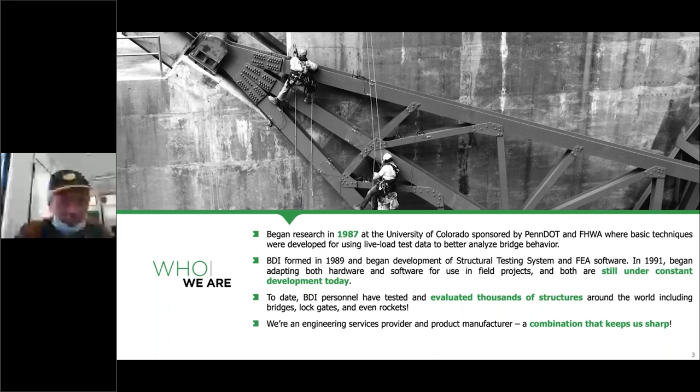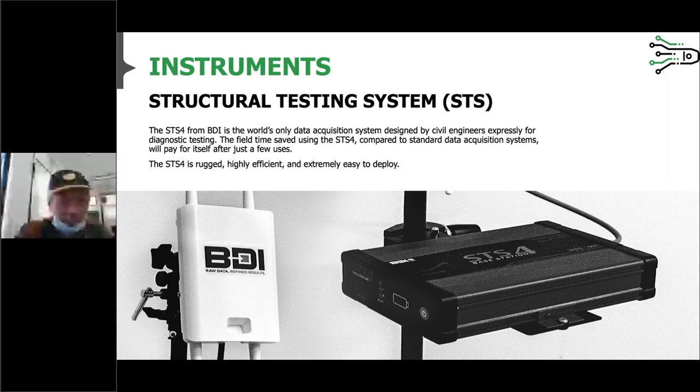The system really contains a few components when it comes to how it works. Typically, you'll see a group of sensors and data acquisition - in this case, we have 4-channel nodes and a group of sensors, and there will be many of these placed around the structure. We'll have a base station that will create the wireless network on site, and we'll have a load position indicator that we use for tracking the position of the truck on the bridge as we're conducting our test. And then we have an application where we would be controlling this hardware in real time while we conduct the test.

What makes our system unique really centers around our IntelliDucer. This makes the system very easy to install. Every single sensor that we plug into the system self-identifies - within this connector here, we have a memory chip, and it will contain all the information about the sensor, so that when we're in the field, we can plug it into any one of these nodes, any channel, and it will automatically identify itself.

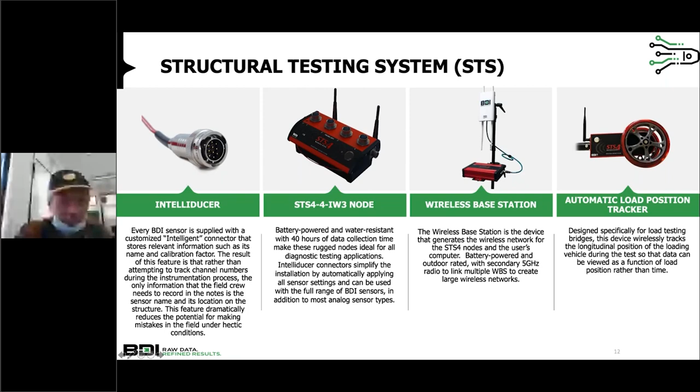The next set of instrumentation we have is our structural monitoring system. This is a little bit more complicated in that we have a system that is intended to be deployed permanently or semi-permanently on a structure to collect data over some period of time, or maybe even the life of the structure.

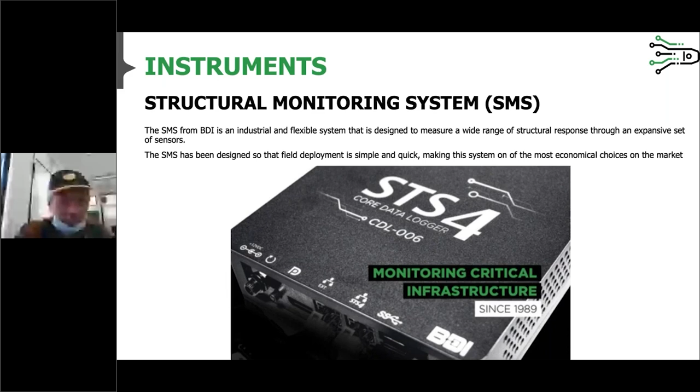So this system contains a few main components, and I understand there's a lot of words on here - we'll be sharing this presentation with everybody, so we'll give you a chance to download this after the webinar. But essentially, what we typically have is a central data logging system that will have our data logger, some sort of external communication method, which could be a cellular modem, satellite modem, or maybe a direct landline. We would have a battery backup system and then some source of power.

Within there, we would have internal communication and power distribution. Then we would distribute the data acquisition system out to closer to where the sensors or group of sensors are located. So really what we call this is a distributed data acquisition system for larger scale monitoring applications.

The other side is how we collect the data itself. We have applications to configure the system locally or remotely. We can push the data to a client server, or we can push it to our cloud and provide a hosted service, giving our clients the ability to log in wherever they are and manage the data that's being collected.

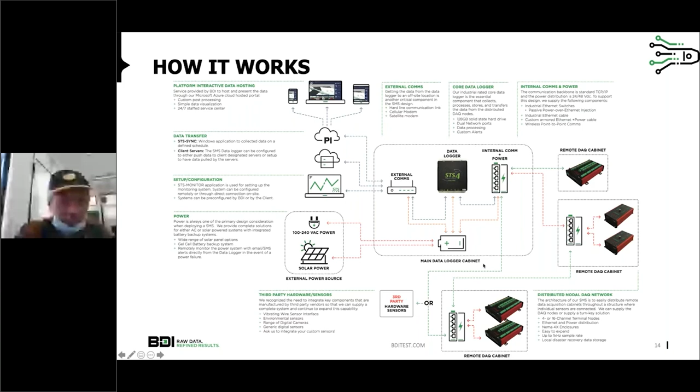The systems really break down into a few main components for us. We have data acquisition devices that are distributed throughout the structure. We have our core data logger, which is the brains behind the structural monitoring system. It collects all of the data and processes it into data files, then ships that data out off-site. And then the other component is really the power and communication of the system itself. It's important to have a very robust power system as well as a robust and redundant communication system in a monitoring project.

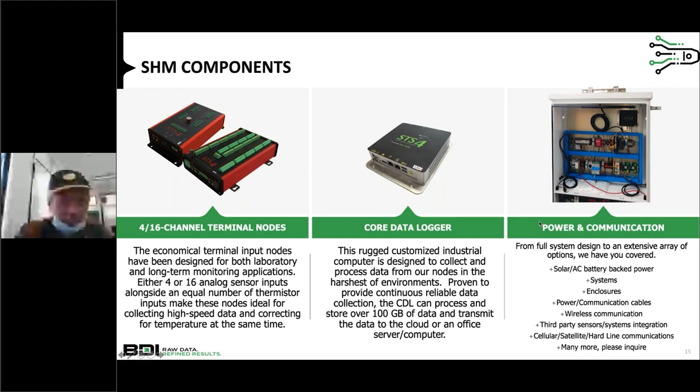With regards to sensors, we produce really just a handful of sensors, which accounts for probably 80 to 90% of the sensors that we typically use on a structure. That's strain, acceleration or vibration, rotation, and then also foil strain gauges when we need to measure strain at the surface of the steel or concrete, and then displacement sensors. These are really the main sensors that we deploy out on a project.

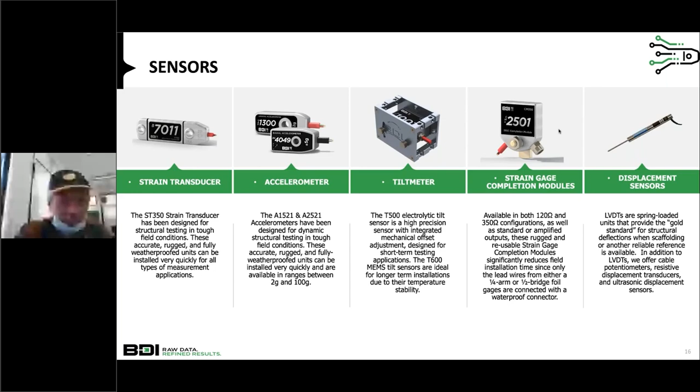We can also deploy other devices as well, depending on what the project is looking for. A very typical system and sensor we would deploy is an acoustic emission sensor, and we use those for identifying cracks that might be occurring in steel or concrete. They're particularly used on cables and pre-stressing concrete where there's post-tension tendons, and we're concerned about the potential for wire breaks within those tendons as these large cables age and maybe don't have the latest dehumidification systems or aren't sealed correctly. They tend to corrode, and as you get wire breaks, it's important to identify those, and acoustic emission can identify those.

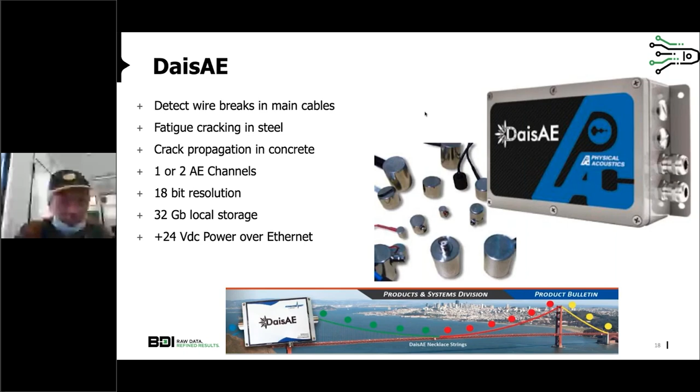Other sensors that we've integrated that are common on many of the larger scale monitoring systems include vibrating wire sensors, a very typical sensor that produces many different types of measurements. Weather stations are very typical to include on large scale structures. We've included pressure gauges in some instances where we're looking at a pressure cell, maybe at a bearing location. Load cells may be used in line, in some cases in cables or tendons.

A common one that we've installed as well is weigh in motion, and this is important for being able to track the load that's being applied to the structure in real time. We can correlate the load to the response of the structure. Wind speed is another common measurement to take, especially on large scale cable stay or suspension bridges.

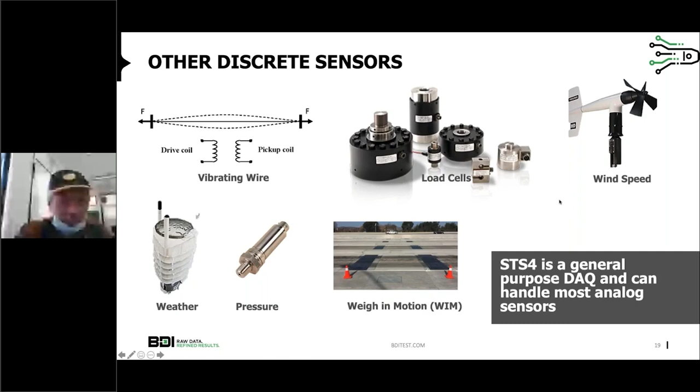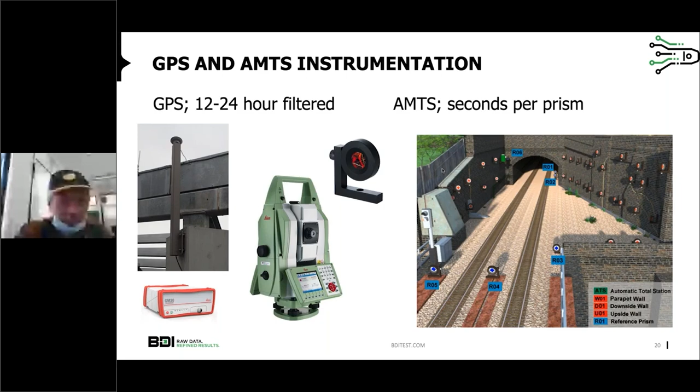Another system that we would integrate on different monitoring projects is GPS sensors and automated total stations. They can be used very effectively in some cases where we're looking at the three-dimensional position of, say, a tower on a large cable stay bridge or suspension bridge. An automated total station will help to look at a deflection profile of a large scale structure, so they're nice tools to add to typical structural monitoring.

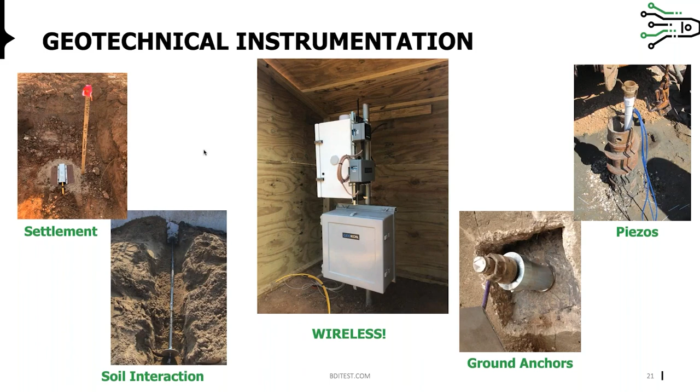Geotechnical instruments are also critical to include in some of the monitoring that we're doing at the outset of construction, looking at potential for settlement, interaction of soil with the abutments or piers, ground anchors in some cases we've installed, and of course groundwater elevation, which is always critical for looking at slope stability around a structure.

Vibration sensors are also another common one, and I think probably used a fair bit in Indonesia, since there's a very highly active earthquake area there. Being able to identify earthquakes and the peak ground acceleration as it correlates to the structural response is a very common measurement to include in a monitoring system.

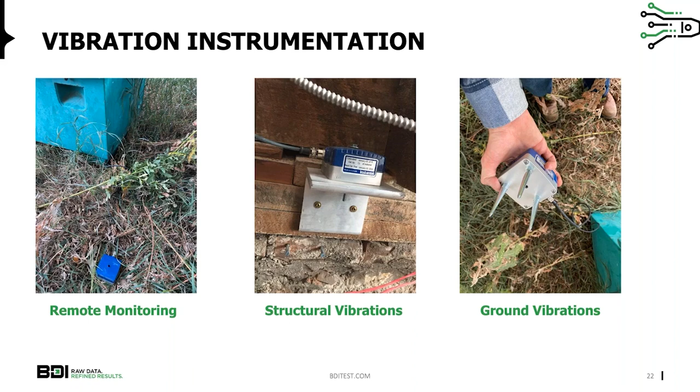I mentioned a little bit about weigh in motion. Why it's really so important is we've used this for looking at fatigue cycles in structures, to be able to look at the true live load impact that is being introduced on the structure itself. Overall, it's quite economical to install these weigh in motion systems now. There's a couple different varieties depending on the accuracy you're looking for, but they work very well for correlating load response to structural response, and even more important nowadays, as digital twin modeling is becoming much more prevalent in structural health monitoring.

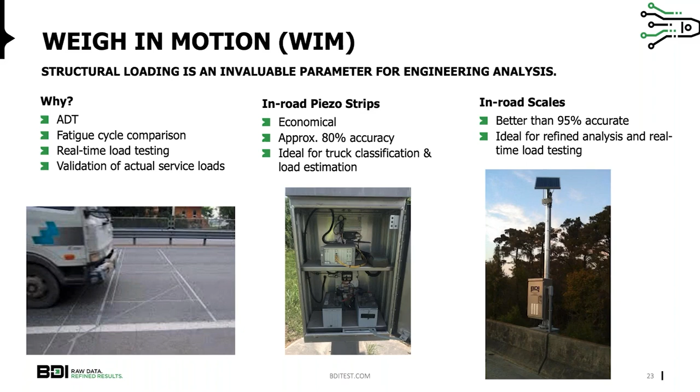Wireless, of course, is another tool to deploy depending on the difficulty of being able to install a hardwired system. Being able to integrate different wireless technology with maybe more traditional structural health monitoring is really important to be able to keep a system more economical, and now works quite well, even running on batteries for many years at a time now. So these are all the typical tools that we look to deploy on a monitoring system.

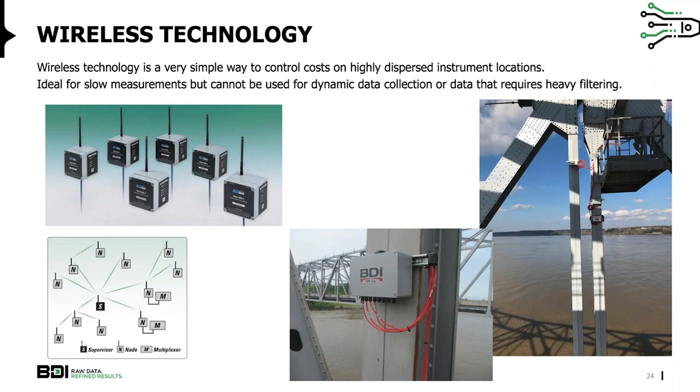When it comes to our software, again, we tried our hardest to develop a very effective tool and a powerful tool, yet keeping it very simple to use. So with everything being self-identifying, it's very easy to deploy a testing system or a monitoring system and immediately start collecting data.

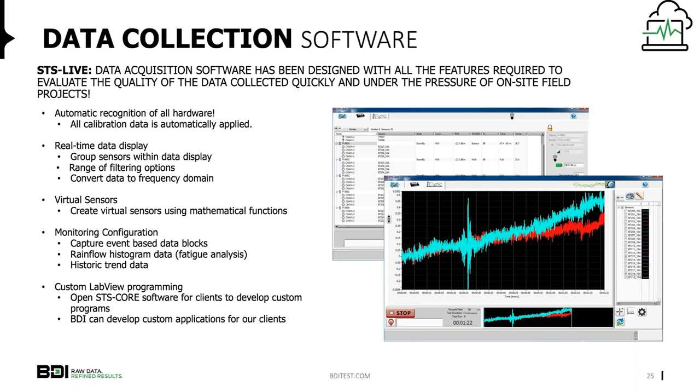It gives us the option to add filters to the data, essentially allowing some more refined data processing on the data that was collected. This is typically pretty important as we start refining that data and preparing the data for what we typically do, which is a finite element model analysis coupled with the data that we collect.

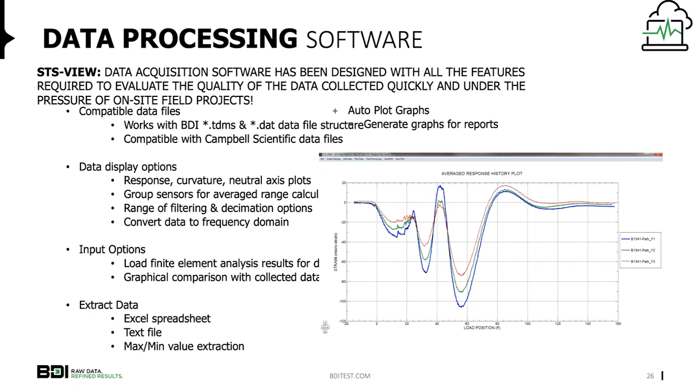This application will allow us to enter the cable properties. With those cable properties, it can find the peak frequency mode and calculate the fundamental mode so that we can calculate the in situ force of the cable. We have quite a few projects where we're hired to go out and evaluate cables that are installed on various structures. And this is the application we use to do that.

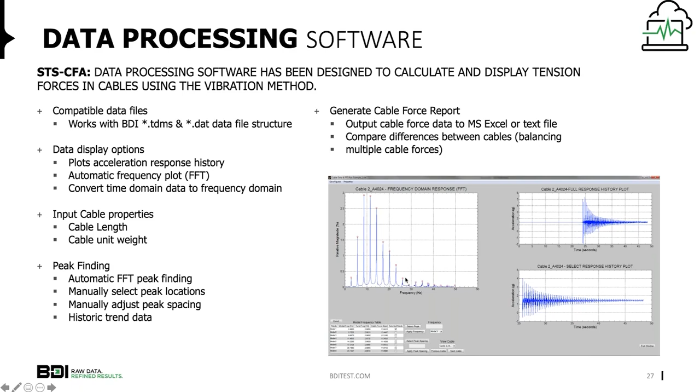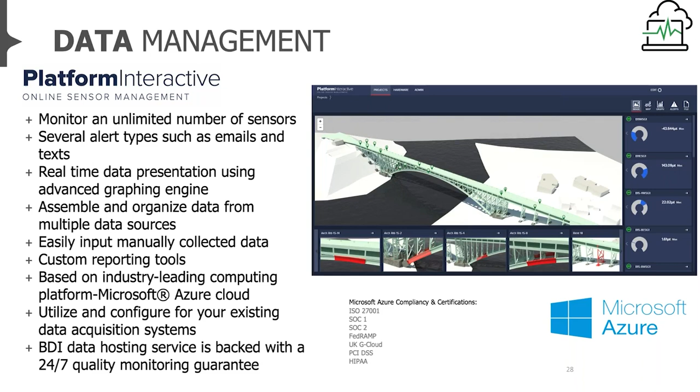The other side of our application or software is really the data management for large-scale monitoring systems. And I think it's extremely important to have a tool that can represent and display the data in a meaningful way. Most owners of structures are not interested in looking at the raw data or all of the data being collected on a structure, but they're interested in what maintenance decisions need to be made on that structure. So we tried to develop an application that will really help owners make real-time decisions on maintenance programs for their structure.

Another important aspect to particularly structural health monitoring is the quality control of the data. How do we manage the quality of the data coming in, and how do we know that all of our systems are performing optimally? So we have systems that we've developed to manage our communication, manage the hard drives of our data logger, manage the power systems that are out on a given site, and give us warnings when things aren't looking like they're up to where they should be. So this is, again, an important part of being able to manage a structural monitoring system.

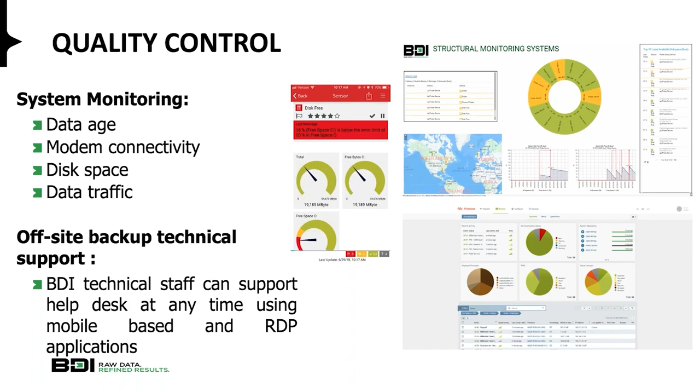So next, I'd like to talk a little bit about diagnostic load testing. This, again, as I mentioned earlier, is really how the company started, and still one of the main services that we offer as a company here in the US.

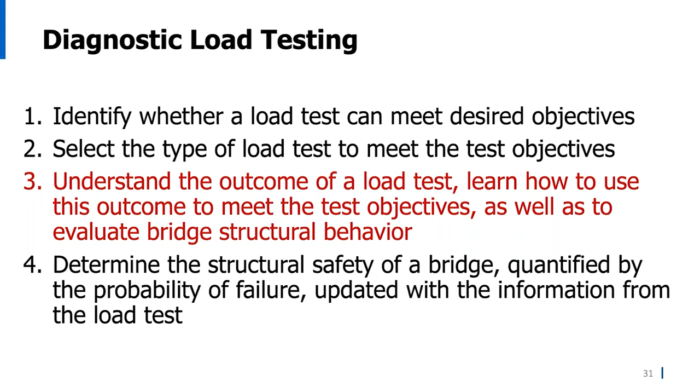Part of conducting a diagnostic load test, we really need to identify whether a load test can meet the objectives. First, we have to understand what problems are occurring with a structure and will a load test meet those objectives. Once we understand what the problem is, then we can select the type of load test to meet those objectives. Understanding the outcome of a load test, learning how to use this outcome to meet the objectives, as well as to evaluate the bridge structural behavior. Then we can determine the structural safety of a bridge, quantified by the probability of failure, and update with the information from a load test.

So really, what is a load test? A diagnostic load test measures the true actual response of a structure against a known load, and that's for the purpose of developing a realistic analytical model. The load tests are often used to reduce uncertainties with respect to as-built conditions that may not be able to be analyzed through traditional methods. This is typically secondary effects, something like a guardrail, a sidewalk, what is the true transverse distribution, or potentially other secondary non-structural elements that may change the response.

We typically use a maximum service load for the load test itself, and it is typically performed in a very short time frame with a low impact on traffic. The data that's collected is used to refine and validate an analytical approach, and that is typically a finite element analysis or finite element model of the structure. The final result is typically an updated load rating for the bridge with critical load rating locations.

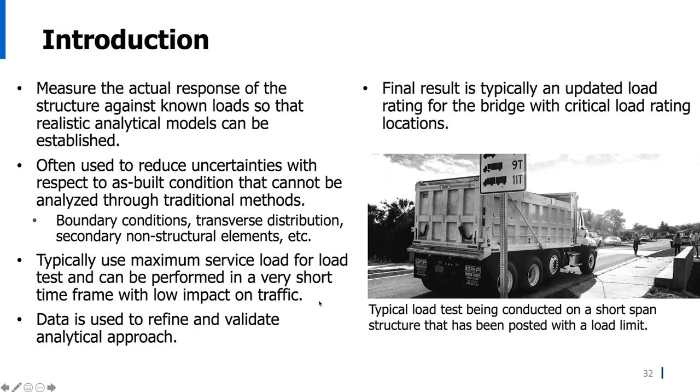Skip one here, sorry about that.

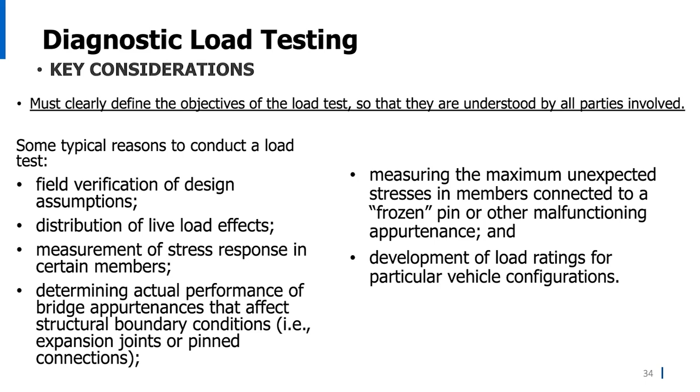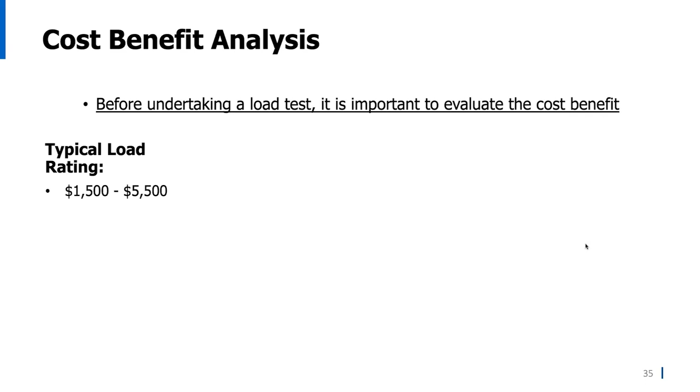One thing that's always important to look at is the cost benefit analysis before undertaking a load test. These numbers are typical average range in US dollars, but if we were to conduct a typical hand load rating calculation, the cost would range between $1,500 and $5,500. A typical diagnostic load test, this is what we would charge to go out and conduct a load test here, ranges between $25,000 and $35,000, but does not include access or traffic control. Typically, the access and traffic control is handled by the bridge owner.

And then what are the alternatives? What has to happen if we don't conduct a test? There's potentially replacement of the structure, potentially strengthening or repairing, or load posting the structure, which may have economic impacts with having to reroute critical traffic. So really, it comes down to going through the exercise to calculate what that alternative is, and that's going to allow you to better understand the cost benefit.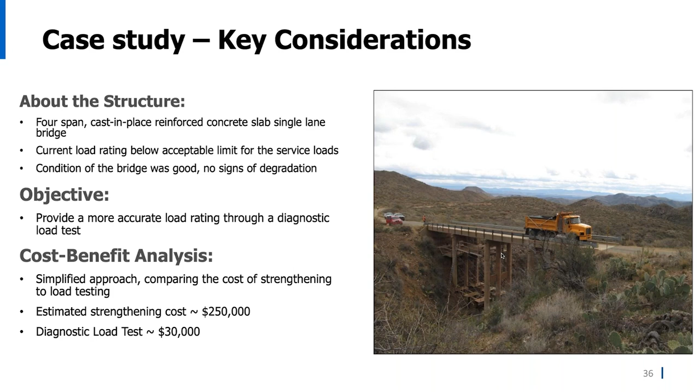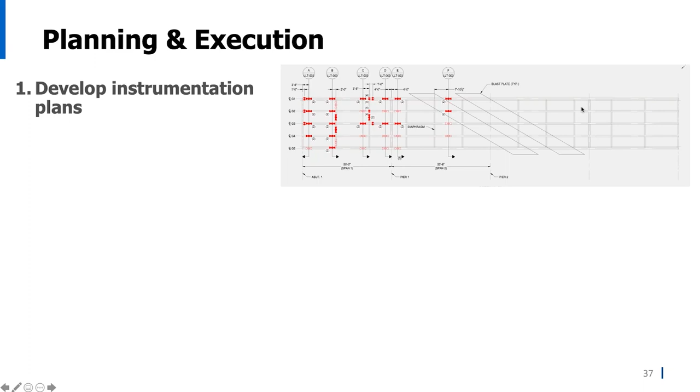So the first phase of any diagnostic load test is planning and execution. The first thing we do is develop instrumentation plans. And in a structure like this, where we have 4 spans, we focused our instrumentation on 2 of the 4 spans and used the symmetry of the bridge to assume the responses would be the same in those other spans. Site planning: we had to develop access to the bridge and traffic control, and we had to hire a loading vehicle, in this case a dump truck with gravel.

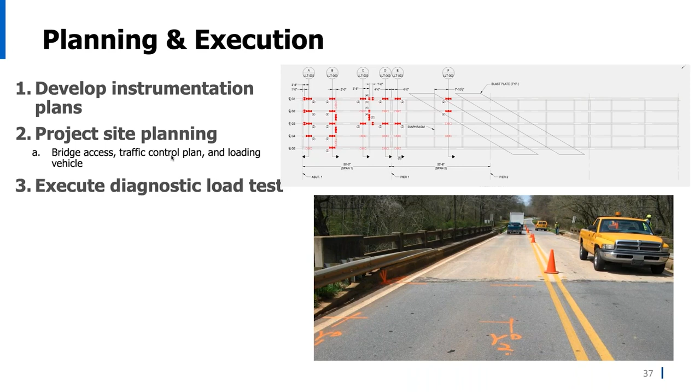The next is we execute the diagnostic load test. We collect the data on site, and one of the more important portions is to really validate that data while we're on site. There's a lot of cost in going out and collecting the data, so we need to be sure that we are collecting good quality data. And again, that goes back to the software we've developed, giving the engineer on site the tools to evaluate that data and ensure that they're collecting good quality data.

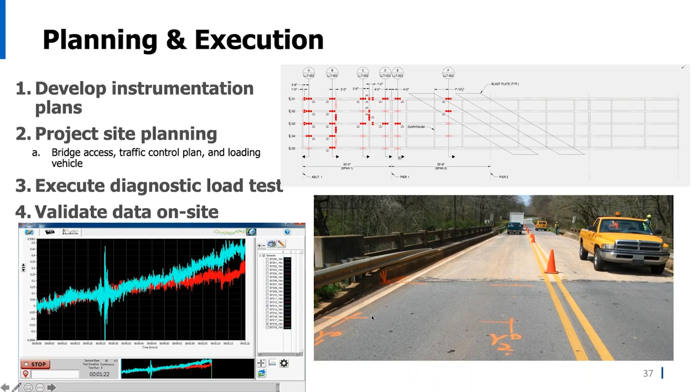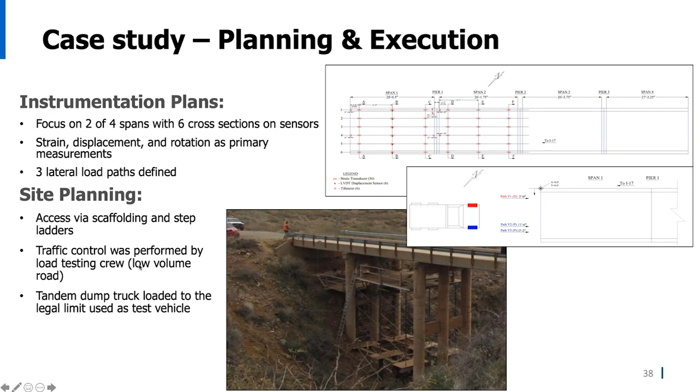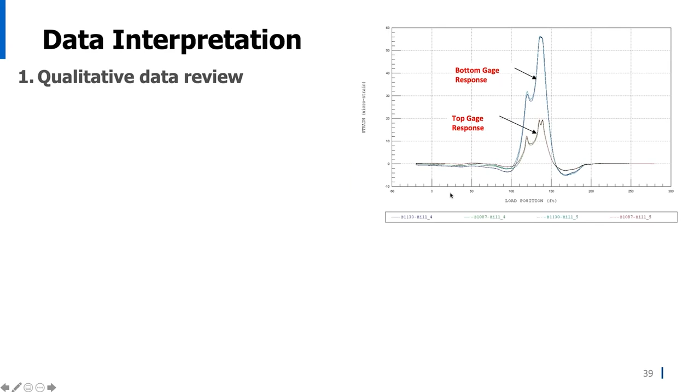Data interpretation: the first thing that we do is we look at the quality of the data. We look at reproducibility and looking at data that starts at 0 and ends at 0. So we spend a good amount of time evaluating that data up front before we start getting into the analytical model. The next is to develop our analytical model.

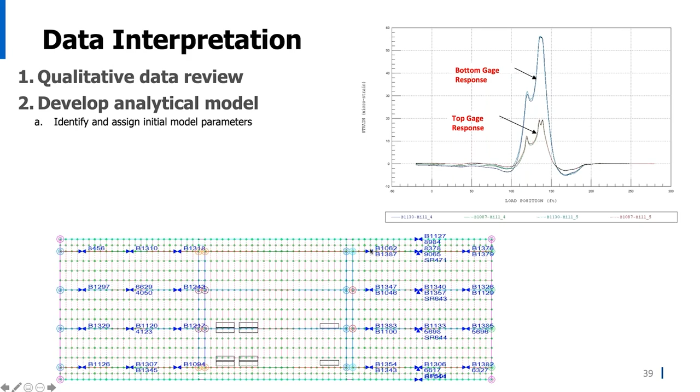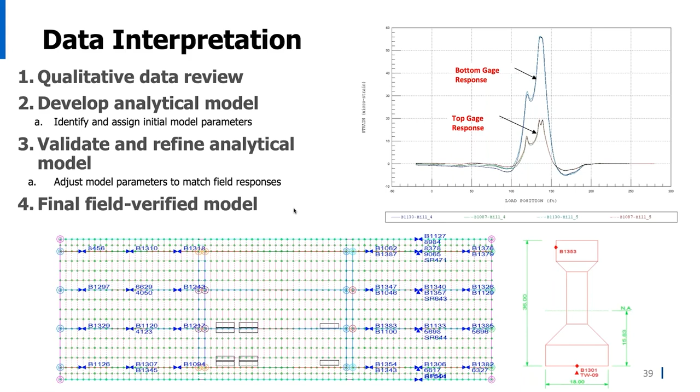And as you can see here, what we do is we reproduce the field load test in our finite element analysis software. You can see sensors even in our finite element analysis. You can see the footprint of the truck. So we're reproducing that load test in our computer model. We then start adjusting the parameters of our model until we have a final field verified model. The results from our finite element analysis match the results from our field test. So again, we're looking at the quality of our data, reproducibility.

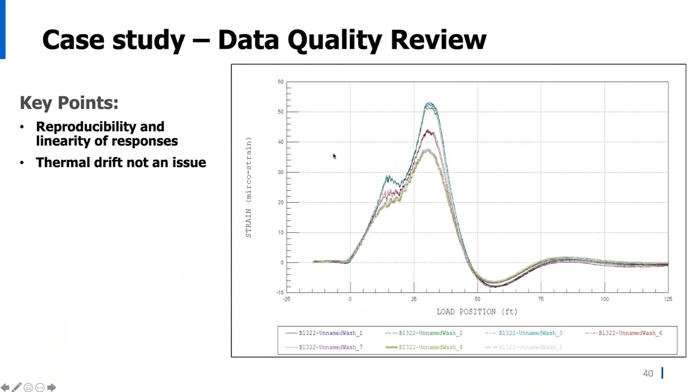Some of the modeling parameters, and again, I know there's a lot of words here and I don't expect everybody to read them all, but we have some basic parameters that we look at refining. Secondary members stiffness, bearing support conditions, modulus of concrete is a typical one for us to be adjusting. Member eccentricities, really the geometry of our model, and then connection stiffnesses.

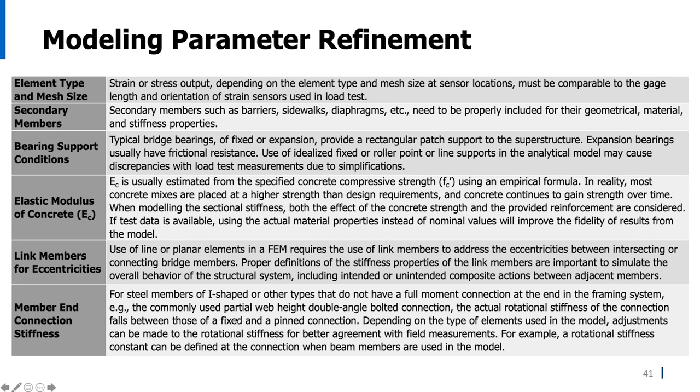In the case of the bridge we tested, these were the model parameters that we developed for this bridge. It was a 2D model of shell and frame elements. We had a 2D footprint of the truck. We did loading increments every 2 feet. So we had 204 load cases. With the 36 gauges and 6 displacement, 6 rotation, we had 9,792 measurements to compare against for all those load conditions. So you can see it's a very refined process for analyzing and adjusting our model.

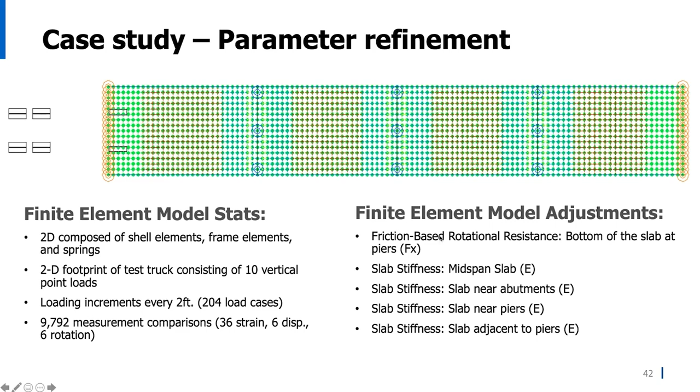What we adjusted were the stiffness of the supports, the slab stiffness in different regions of the bridge, because we had positive moment and negative moment regions that crack differently and create slightly different stiffness of concrete there. The end result, you can see the dots here overlying on our lines. You can see we had a very good correlation between the field data we collected and the analytical model output. We had minor adjustments to some of our parameters, and finally had a very high correlation coefficient between the measured response and the analytical data.

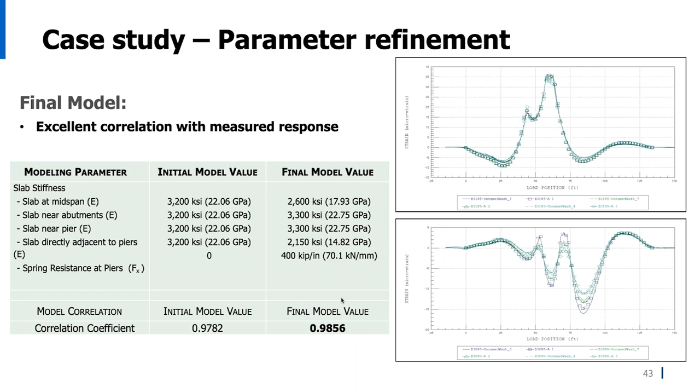And then finally, we apply our load rating formula within our model itself. We have potentially some adjustments to make in our model to reduce or to add some conservatism to the capacity. We still do have to calculate our capacities of the elements of the model based on geometry and member properties. We have to apply our dead load to the structure, and then we can extract those results.

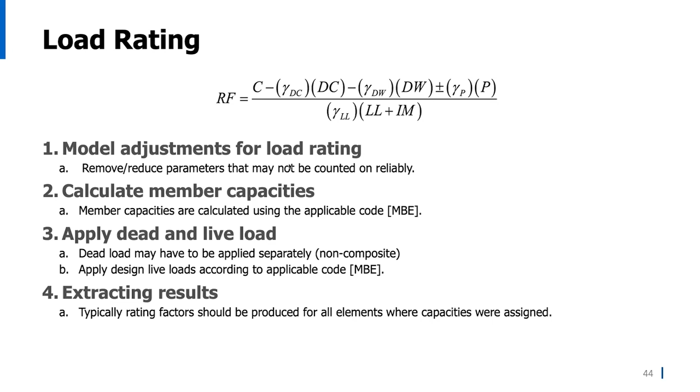And finally, we can report. And it really is a very focused report that outlines the results and any recommendations. Typically, this involves an executive summary with purely the load rating results, a summary of our load testing procedure and instruments, what our analysis approach was for the project, and then any load rating recommendations. With a finite element model, we can really provide detailed load ratings for every component of the bridge itself. So it becomes a very powerful report if we're going to target any retrofit or construction work to strengthen the bridge itself.

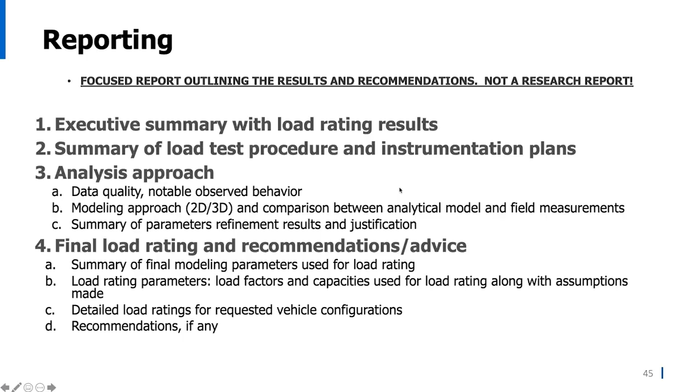So moving on from diagnostic testing, we'll talk a little bit about structural health monitoring. So structural health monitoring, we usually get asked why, and what are the reasons we need to execute a structural health monitoring program. Typically, it involves looking at structural performance over a larger period of time, where a diagnostic test is really a snapshot of how the structure is performing at that time. When we want to look at the performance over a longer period of time and take into account some of the other variables other than pure live load response, like settlement or temperature-induced stresses, potentially it has to do with the construction of the bridge itself, and maybe for verifying new design techniques.

Other reasons are for supporting inspections, looking at the performance of key components of a structure that are typically causing issues on the maintenance side. It allows the owners to keep a remote eye on the performance and particularly potential problems or specific problems within the bridge itself. We can look at road surface conditions, and we can look at weather and how that relates to the performance of the structure.

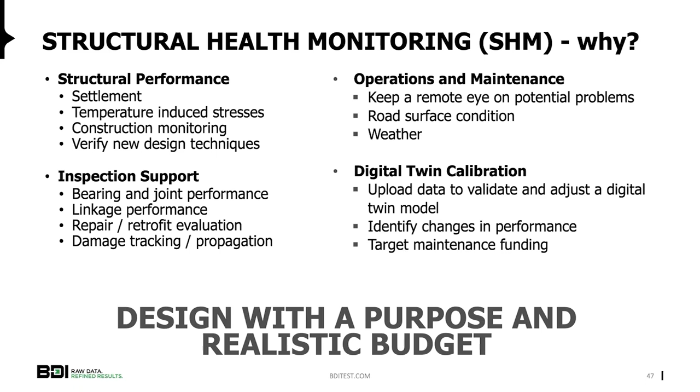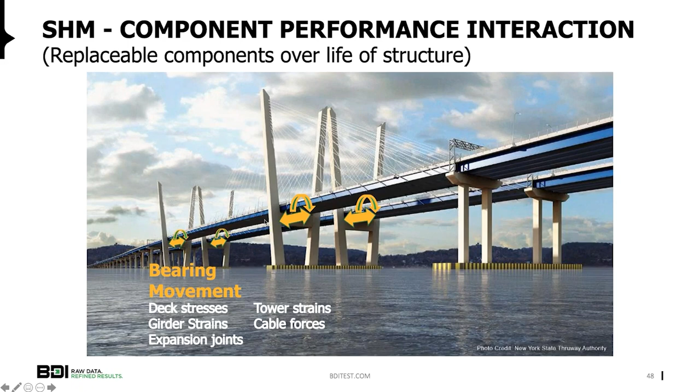Typical components for a structural health monitoring system. Bearing movement is always an important aspect, and bearing force itself. So looking at how bearings are performing on a structure and how much the structure is moving with respect to temperature. Expansion joint movement is another common one to look at how much expansion's moving.

Cable forces, we often will include accelerometers or load cells to identify what the force is in a stay cable or a suspension cable. Looking at deck stresses and superstructure strains as well. These are some of the main components that make up a typical structural health monitoring system.

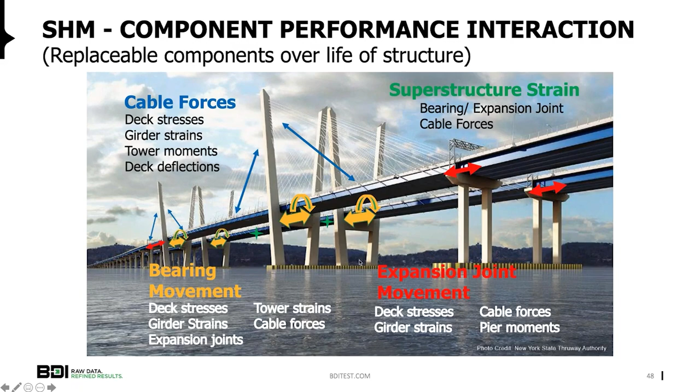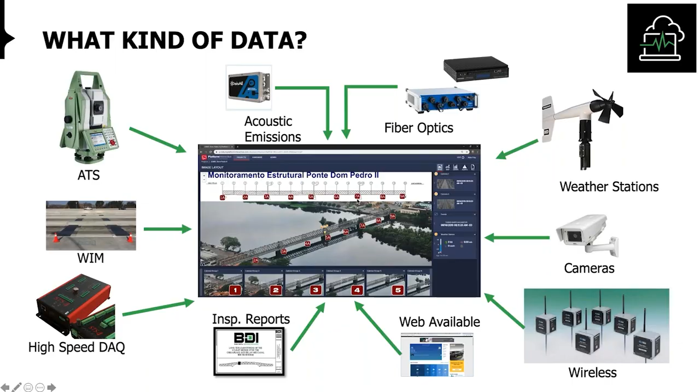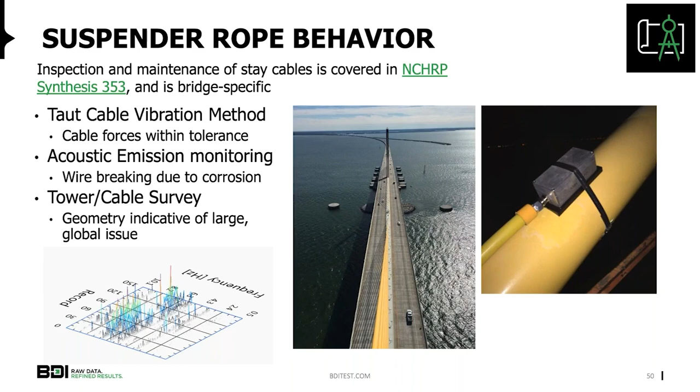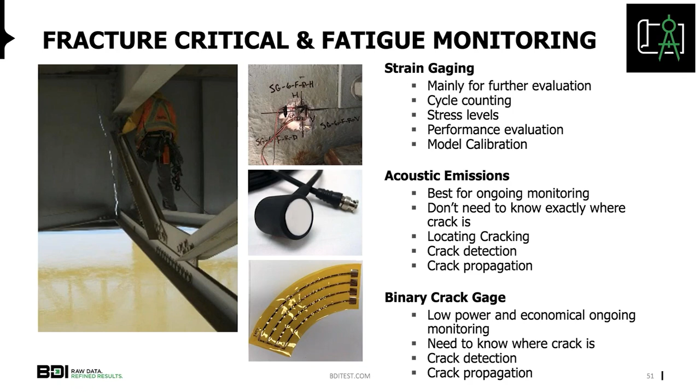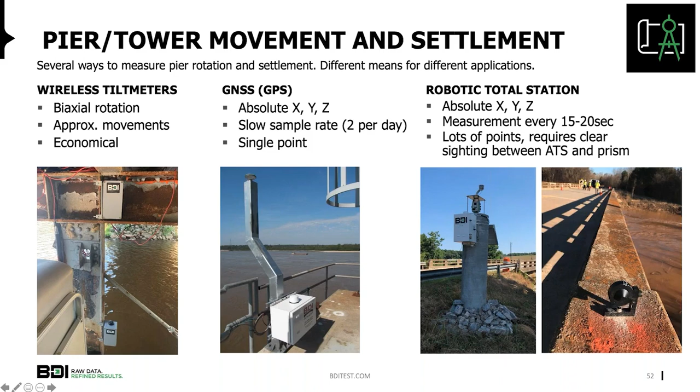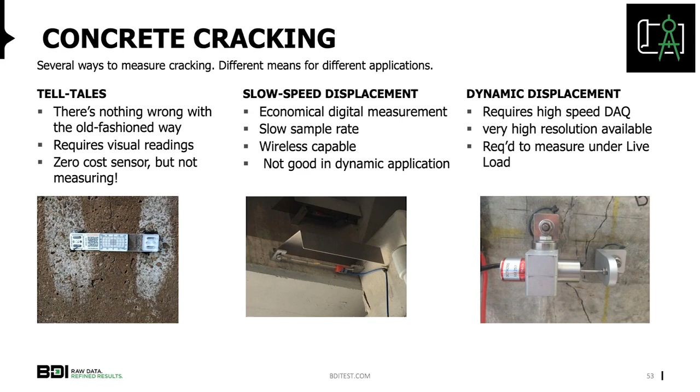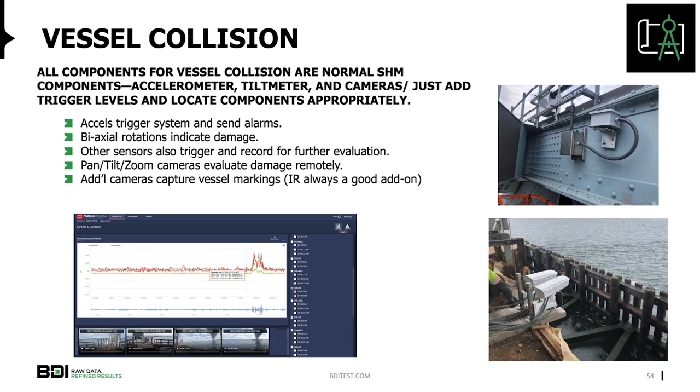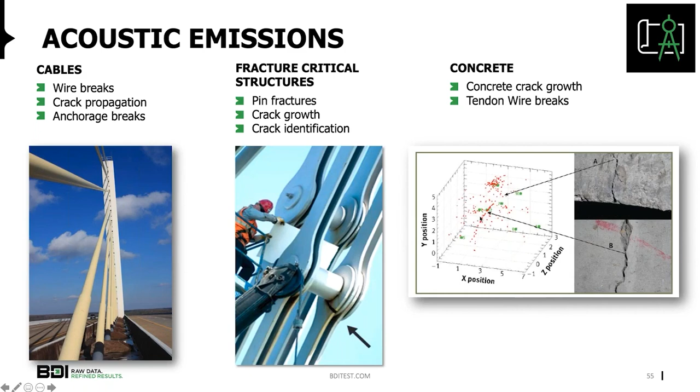Acoustic emission sensors can listen for this type of cracking, and with the right sensor arrangement, can even identify the location of the crack itself. With multiple sensors, we can map the location that we're hearing cracks from and develop three-dimensional charts of where the crack is occurring, so we can target the inspection team to go in and inspect specific components of the bridge.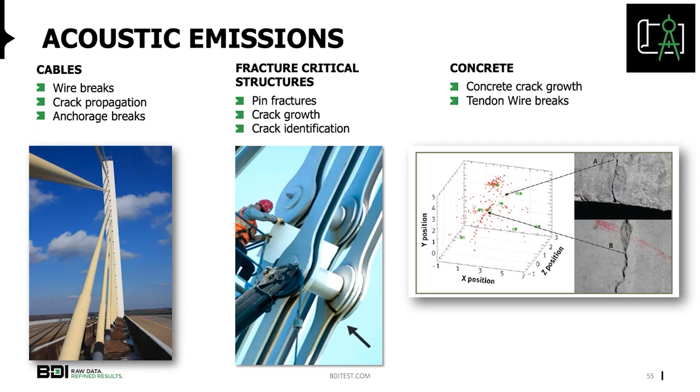I mentioned integrating traffic cameras. This is a very common sensor that we will integrate. We've used a variety of different types, and typically the ITS cameras that most people are familiar with. We tie this to our monitoring system and control the camera so that we're capturing images related to events on the structure itself, and present that alongside the data we're collecting.

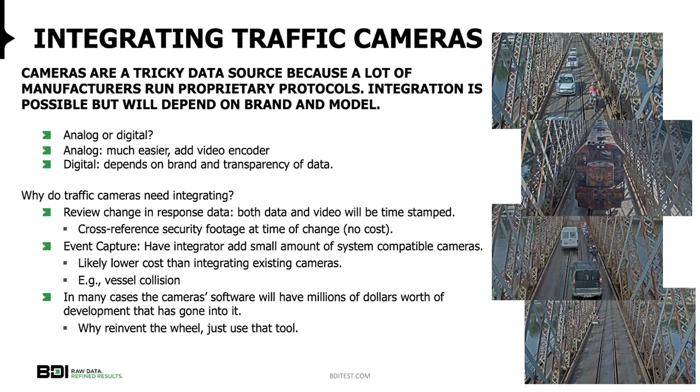When it comes to data management and visualization, we're trying to present the data in a meaningful way, but also to have a very secure portal for our clients to log in, manage, and review the data they're collecting, as well as setting up alerts for particular sensors they're concerned about. Our system is all hosted on Microsoft Azure.

It's a very high level of security. We have 24/7 phone support as well for any issues our clients are having reviewing the data. So it's really a scalable platform for us to deploy on many different structures, as well as very large scale structures with very large data volumes.

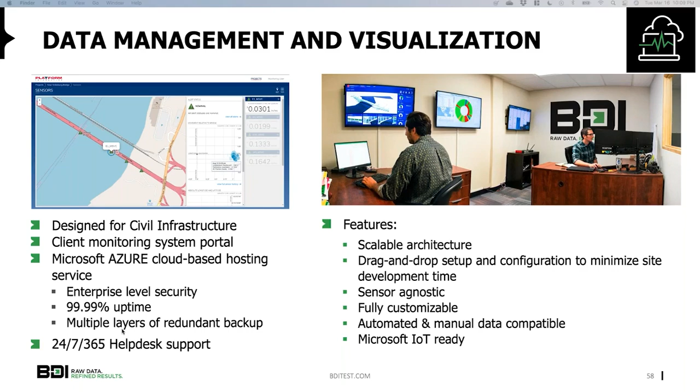This is a snapshot of one of our projects in Arizona. We've got a few bridges that we've instrumented and are presenting all of this data on this secure website. Typically we'll have some type of picture or rendering of the structure, with the instrumentation plans integrated into the view, as well as rough locations of where sensors are located in the structure.

So it's very easy to get a snapshot of the condition of the sensor, as well as drill down into the individual sensors and look at the data history for the last day, the last month, the last year.

This project also includes cameras on site. So like I've been mentioning, we can look at an event and go directly to the image and look at the type of truck that was crossing the structure that created that event.

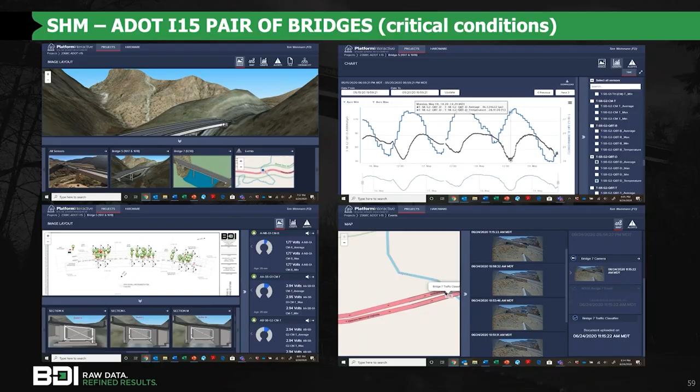I mentioned a little bit about managing the monitoring systems. I think this is an area that is overlooked by most systems that are deployed, and really overlooked by a lot of the owners of structures. It's extremely important to have a monitoring system to evaluate the performance of your structure, but it's equally as important to understand how your monitoring system is behaving and the health of the system itself.

So having a contract in place so that you can maintain these systems, you can evaluate the condition of the health of the system, really the power or the communication protocols being used are really important, as important as collecting the data itself. So I can't stress that enough.

It's one of the areas that we've pushed a lot on our contracts in the US, to really make sure that owners have a mechanism to maintain these systems. While a lot of the hardware available now is very robust, very reliable, it still requires some maintenance, and having a mechanism to maintain these is very important.

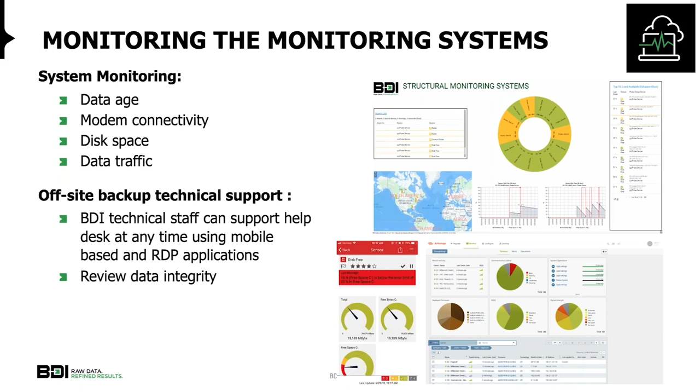One of the areas we've been involved with a lot now is these hybrid systems, where we have a permanent monitoring system for the structure, but we also want to look at a load test for the structure. We've had projects where we've installed a semi-permanent system and then come out and added additional equipment for a snapshot diagnostic test of the structure, and then it would roll back into a permanent monitoring system. That's a very typical process now, and we have quite a few projects that involve that.

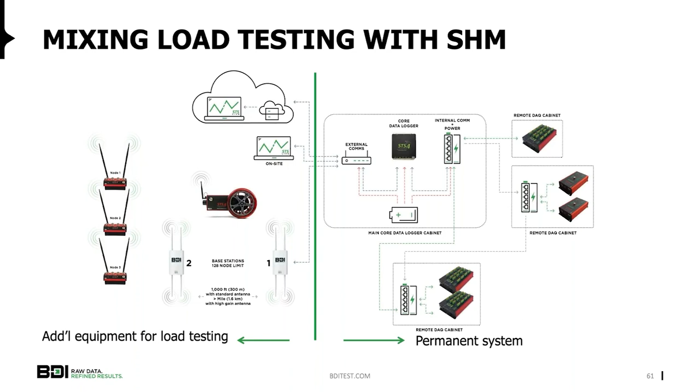So that rounds out my presentation to you guys. I think we have about 15 minutes or so left, and I see there were a whole lot of questions online, which I absolutely appreciate. I don't know that I can read almost any of them, so I will ask Zelfriki to step in, and if somebody has specific questions, I'll be happy to jump back to any of the slides and discuss some in a little more detail.

Yes, thank you for your presentation, Jess. There is a good question now, I see in the question chat. It is a question from Mr. Luhur Subekti ST.

Is it possible to do the dynamic test without stopping the transportation, without stopping the operation of the bridge? Yes, that is possible, and we have done several dynamic tests like that, where it depends a little bit on the structure and the stiffness of the structure itself. So for larger structures that tend to vibrate more, we've been able to use just ambient traffic to collect the vibration of the structure and then calculate the frequency of vibration. So yes, it is possible, but again, it's highly dependent on the stiffness of the structure itself.

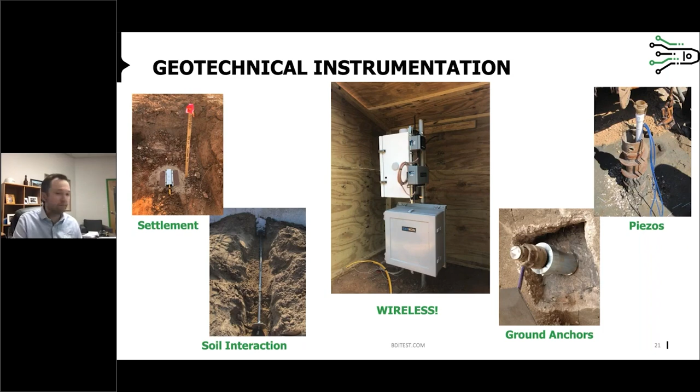There is a question also from Mr. Widi Nugraha again. He says he's interested in wireless sensors, and with wireless sensors he faced a lot of problems with noise and low reliability compared to the cable system. How about the BDI wireless system? What is the problem with BDI - is it also similar to other systems?

For our diagnostic testing system, we've spent a lot of design time reducing noise in these systems themselves.

We've had a wireless system for about 15 years now, and have been using it successfully on many different projects. There is always a potential for interference, depending on the wireless technology being used and the design of the hardware. You have to design it to be immune from electromagnetic interference, and to be somewhat self-healing with regards to communication and data transmitting. I've heard the same thing from many different systems, and depending on where they're deployed, the reliability can be questionable, and the battery life can also be questionable.

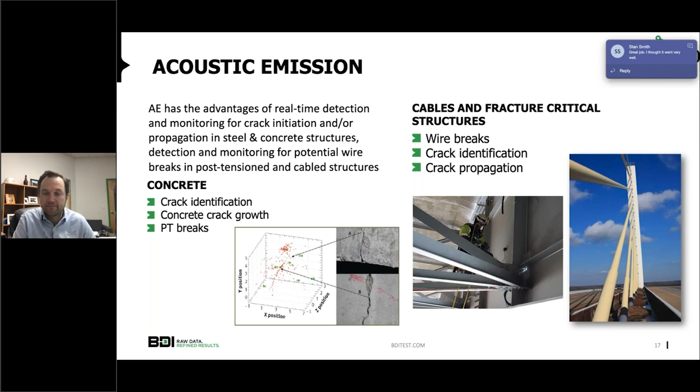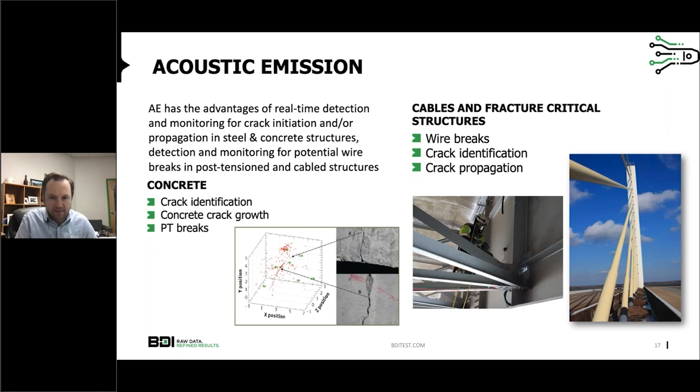There is a question from Muhammad Habibi, how to do a load test for a not too long bridge, a short span bridge, like a railway bridge. Yeah, well, that goes to similar to that example I showed from the case study of the bridge in Arizona. So you can see this is a relatively short span bridge, and most of the diagnostic tests that we conduct are on short span bridges. So there's really no difference.

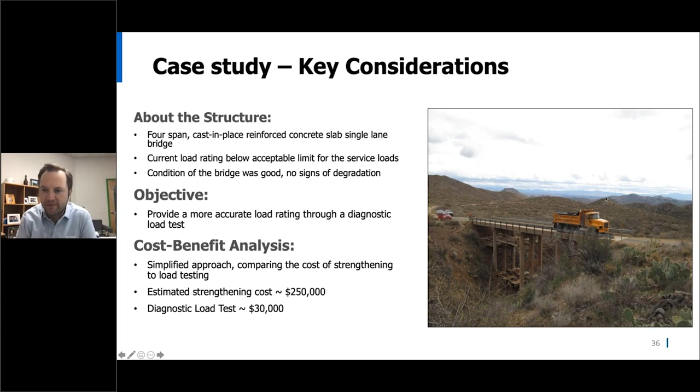We just want to develop an instrumentation plan to collect data that would help us evaluate the load carrying capacity of the bridge. Very similar to what we did on this structure here. And then again, the same thing would apply for a railroad bridge.

Okay. There is also a next question from Dr. Andes Agus Harno Nurdin Shah, Master of Science. How long until we can understand that one building is having a problem, or maybe can fail, with instrumentation? How can we understand, or how long till we understand? Maybe he wants to know the procedure to understand the behavior of the building, whether it will fail, and how long it takes to understand that with instrumentation.

Well, it's a good question, and there's maybe not a direct answer, because we have to think about diagnostic testing or structural monitoring as a tool. This is a tool for us engineers and the owners to make better, informed decisions. So there's not going to be very many tools that will tell you when a structure is going to fail. If there's some level of near failure, like the bridge is going to be falling down, we will detect changes in the structure that would lead us to say, you know what, we have a problem, we need to close this bridge, or it's failing.